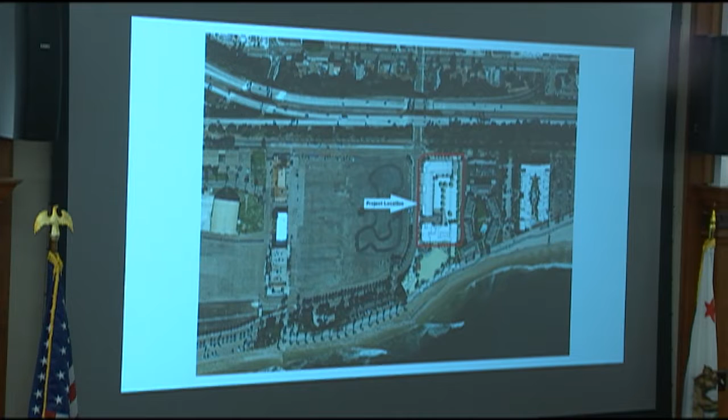An aerial view gives you a better perspective of what it physically looks like now. One thing that happened early on, already completed, is the jog in the park area has been evened out as a lot line adjustment. So when we look at the plans, you won't see that jog, it's just a straight line. It basically swaps the back part for the Hilton property and the front part for the park. Those have all been approved with all the regulatory agencies that needed to sign off.

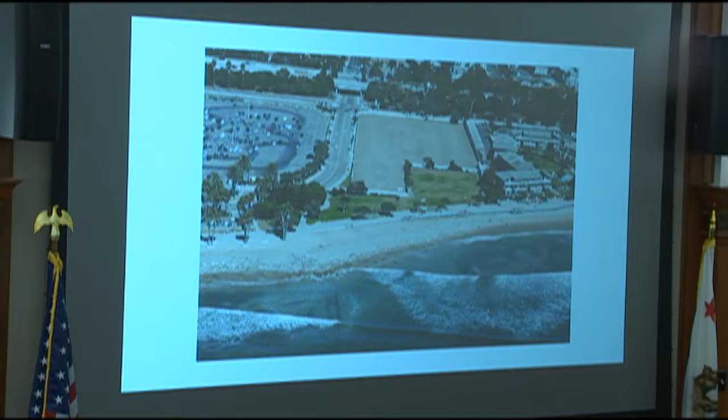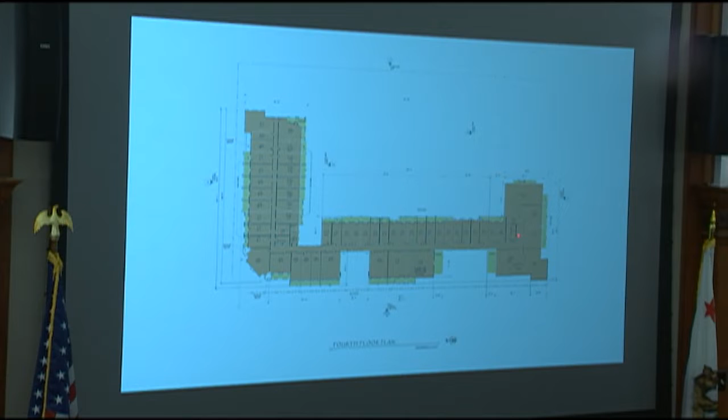These are the decks and terraces, and the more orange is the guest rooms.

This is our roof plan. You're seeing here down below at the second level where that pool deck is, and in this lower right-hand corner, we have a roof terrace. Tom will talk more about that and how we're treating it.

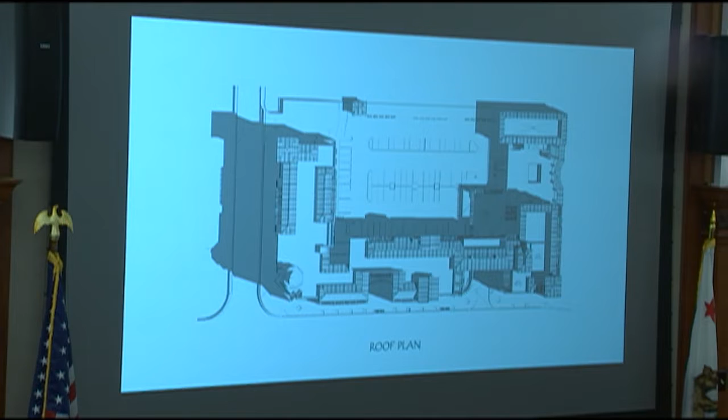So these are our elevations. Along the top is the elevation along Figueroa Street. With a lot of input from meetings with prior design reviews, we wanted a building that looks cohesive, but as a grouping of buildings, as opposed to one long monolithic building. So we've got these compatible different building elements. What you don't see in the flat elevation on top is we've got a lot of articulation.

The lower left one, this rendering is this space in here. It recesses in, and we have a little fountain courtyard in here. This lower right elevation is the entry, that drive entrance that gets you into the auto court and the hotel entrance. So we've stepped back at levels to kind of terrace the building up.

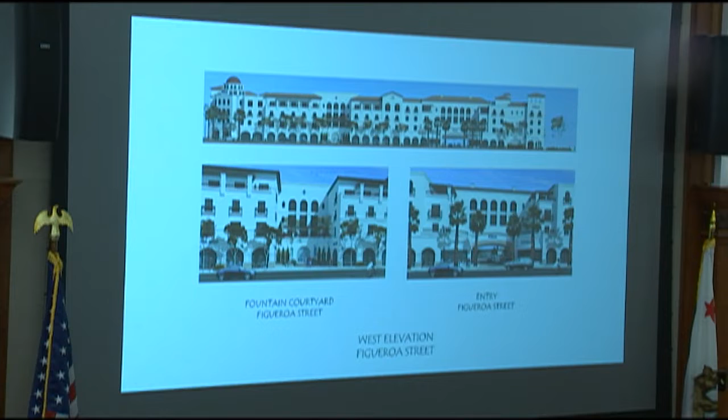And in this view, you get a better sense of the articulation of the building along Figueroa. And the fairgrounds are right here.

Back to the view of the hotel from the promenade. This, and Tom will talk more about this, is that roof deck that's right up in this corner. You're actually able to stand here and see over this edge. The mansard roof acts as the required height of a guardrail, so you're not seeing any railing up here, you're seeing the roof, but you can actually be standing in the space and looking out.

And then here, this is also space you can get into, this little roof here, but Tom can talk more about that. This is the second level, right here in this perspective, where we have the pool, and Tom will speak to that.

All right, I'll let Tom take it from here. Actually, can we go back a slide, please? Yeah.

The idea is, obviously with the view of the ocean and the climate and everything happening out here, we want to maximize the amount of public space. We've got the promenade park that we'll be looking at briefly, in front of the building between the promenade. But these public spaces, getting them lifted up so we can keep control on it. We've got the awesome views, you get the breeze coming through, really maximizing this rooftop element with the pool area and cabana seating.

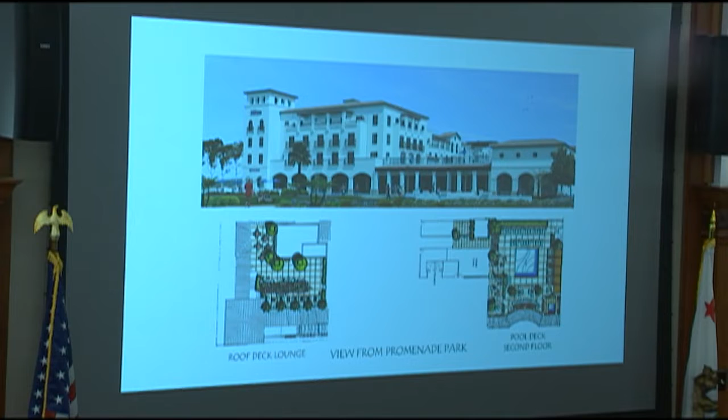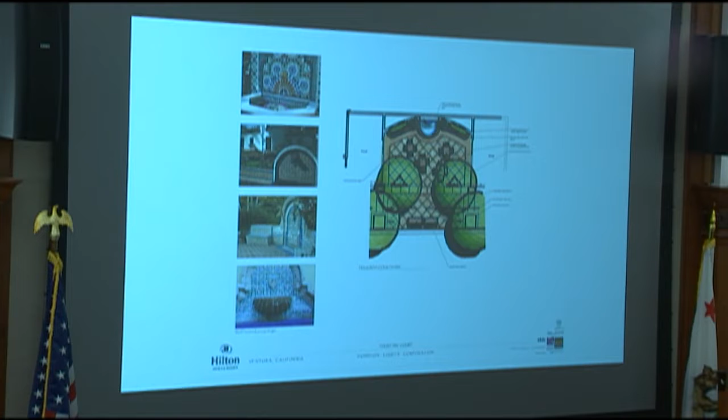Next slide, please. This little alcove is the one Bob talked about before along Figueroa, which runs along here. It's a bit large, but it's an alcove in the building to create a nice little seating area with some trees around it. We've got a fountain that ties in architecturally, so it creates a great little kind of cloistered space along the facade of the building.

Next slide. Oh, and then we have a larger view. I didn't realize we had it set up this way. So you can start to see that better with the ocean over here, the views out, keeping the views towards the ocean.

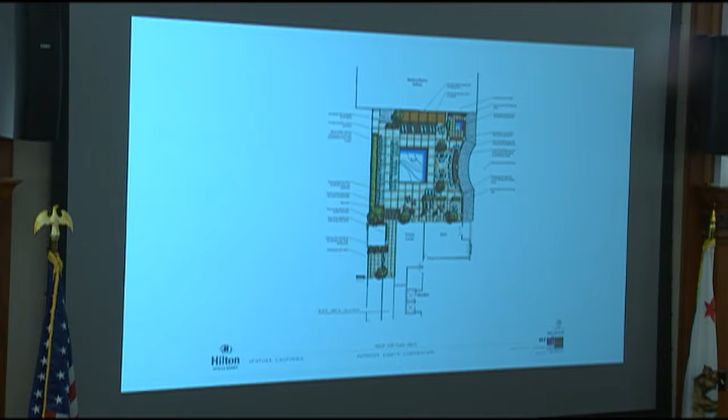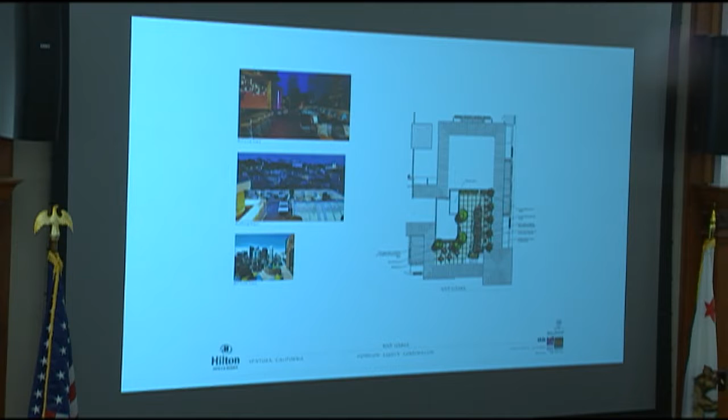And then that rooftop space, the idea is you're really creating a nice outdoor element, and it's pulled away, close to Figueroa, so it's on more of the public side of the building. And then the next slide is going to show the whole site plan to kind of see how we bring it all together.

Again, that roof, that pool area was sitting right up in here. The meeting room space rises up about 5 to 7 feet higher than the pool area, so it creates a bit of separation between the adjacent houses that are there. The bulk of the building, the way the site is set up, encapsulates the interior parking space.

With the way that we've designed that parking space with interlocking pavers, with shade trees, and the way the motor court comes in, it's really meant to feel like an old motor court and not just a traditional at-grade parking lot. So views from within the hotel looking down on it, it's not like you're just looking at a parking lot. It's a very nice part of the site.

We really wanted to activate the Figueroa frontage, so that's the idea that there's some small retail. We've got that little alcove with the fountain. The way the street trees work with the architecture really starts to break up the lineality of the space and make it an engaging, enjoyable space to hang out.

It's important to understand that the property line, the city line between the park and the hotel, is right there along the edge of the veranda. So this is what Pete was talking about - we still have to go through that process again. We already went through the Parks Commission once and they were really supportive of the ideas, but that was about 5 years ago. Our project is from this line backwards.

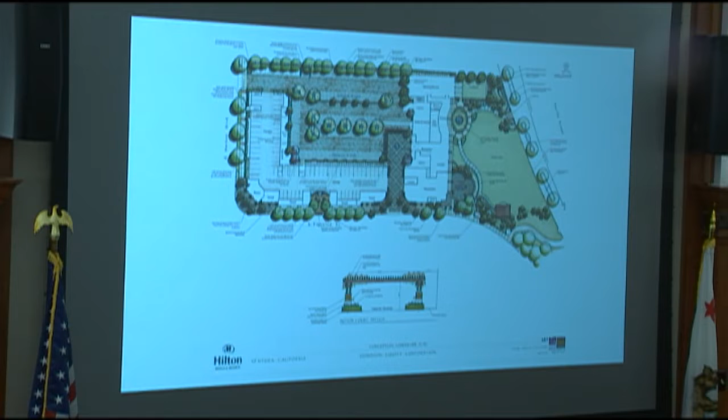I think we went through it really, really quick, just to give you a quick overview with the understanding that you're probably going to have lots of questions, and we're excited to talk to you guys about it. So thank you.

Was there anything more, Bob? No, that's okay.

Okay, do any of the committee members have any questions of the applicant? All right, I'll go ahead and start. Thank you very much for the presentation.

I appreciated your comment about wanting to activate Figueroa. I think that's really important. I like the fact that there are commercial spaces shown there. My concern is with the depth of those and what types of tenants would go in there. Can you explain? I didn't see any dimensions in those. I know that they're sort of long and linear and broken up a little bit. So can you talk a little bit about what the thinking is in those spaces?

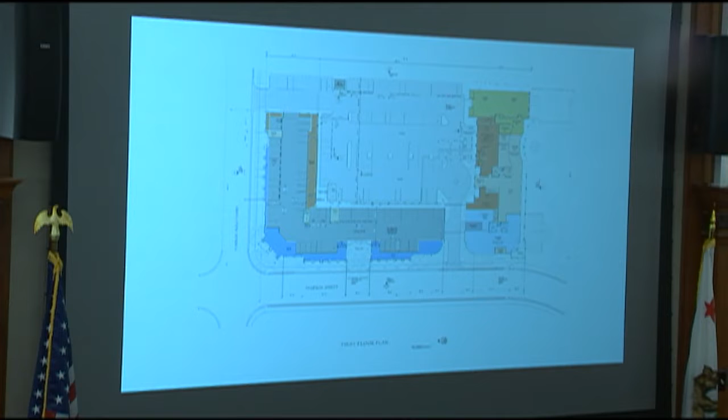No space has been leased yet. As we've been designing these spaces, what we've envisioned is - let me show this here. So this is a full-service restaurant, and the square footage is unfortunately too small for me to read, but I think we got about 3,000 square feet in here, which is sufficient for a full-service restaurant.

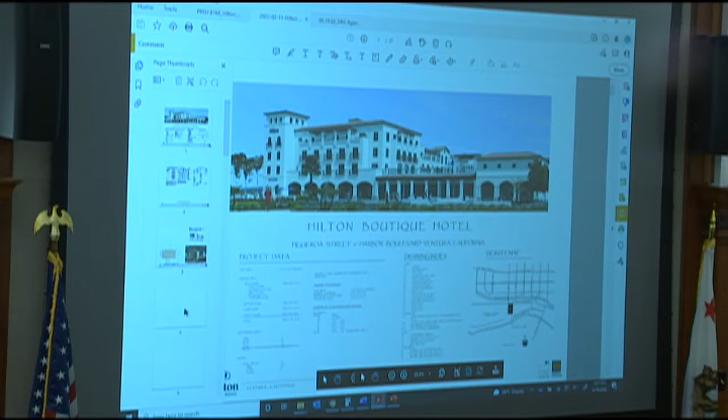So this is all restaurant. With this being the dining area, probably an exhibition kitchen kind of in here, plus back of house kitchen, and our loading for the restaurant off of the drive. So we're not going to tie up Figueroa with deliveries for the restaurant.

This we see could be a nice coffee shop corner. Then these spaces we see, maybe that could be a bike rental or surfboard rental, where you need a lot of display space, not so much a lot of merchandise showcasing. So that's kind of what we were thinking about for possible uses along here - even potentially something like a snow cone or shave ice, those sorts of smaller retail that can activate the street frontage.

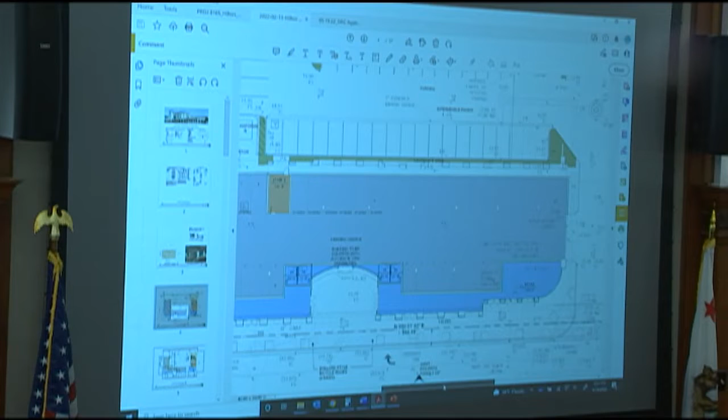What's wrong with the snow cone? Nothing. What is the depth of the blue area there - the retail area, not the deep part, but the thinner part, where you were talking about having the shave ice and bike shop? So for that order of magnitude, this is about a car stall depth. Which is what, about 18? With compacts it's less, so that's only about 9 to 12 feet, is my guess. So it's narrow - very narrow.

Envisioning the kind of businesses that would come in here, it would probably be more of the display part, or if it's a bike rental or Segway rental, that's where they'd have it. But at these corners, this is really the retail entrance, creating this nice courtyard. You come in here, and this is the business end of these spaces, and this is more the display end.

And then here we have another fairly large space, just over 2,000 square feet, which might make a nice little day spa or something like that. But again, that's counting that whole display area, and we're limited to the depth we have because of everything else coming across the site.

It's Harbor Boulevard. We're really focused on Figueroa as the spine that takes you back up into downtown, as opposed to this, we don't really see a whole lot of pedestrian activity here. But we thought this might be a nice place to display, maybe even with the Historical Society of Ventura, some seasonal stuff here.

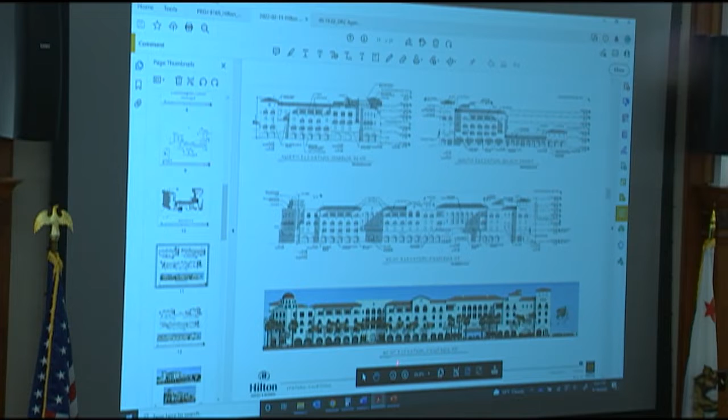Yeah, I think you're talking about this little area in here. Do we have the vignettes? There, yeah, section on that, kind of shows it on the bottom. Yes, up in here. So this all depends on which retail spaces, which retail uses take these two corners. There is potential for maybe getting some seating out here, depending on what retail uses end up there.

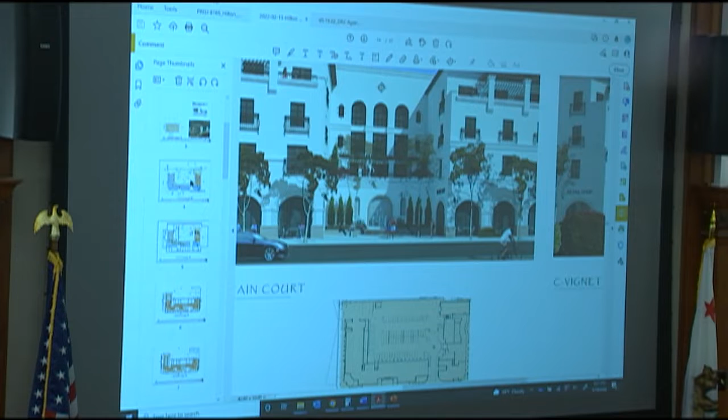And are you dealing with a setback from the property line? Yeah, the property line kind of bisects it, so that's the right-of-way line there, and then our project is behind it. This is 10 feet, this is like 7 or 8 feet, and then the building is like 5 feet beyond that. So from the face of the building to the face of curb, it's 12, 13 feet, something like that. Over on the Harbor side it's deeper, more like 20 feet from the face of the building to the curb.

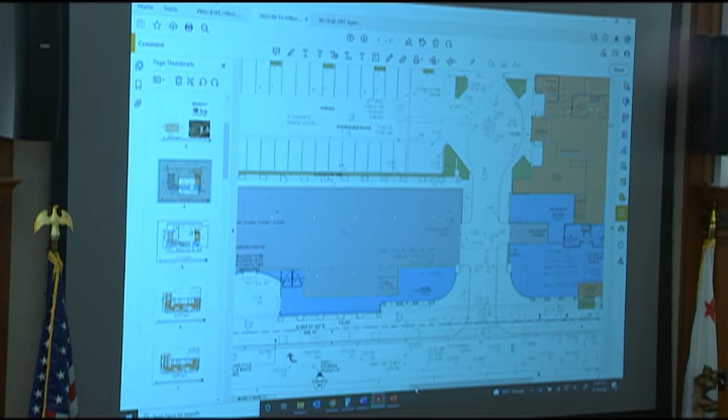Question for staff: is there a desired sidewalk width along there from either planning or land development? On Figueroa Street, that's one of the streets in the downtown specific plan that has a streetscape plan associated with cross sections, so we'd be looking that they build out what the downtown specific plan requires. I'm not quite sure the exact dimension, but I believe it's 10 or 12 feet, and we'd be looking that they do that.

Okay, and I'm sorry, just to comment on that, we did look at that, but I just realized I don't know if there's been any updates to the standards recently. To the downtown? No, not to the downtown specific plan. So we did look at it at the time, I just don't remember the specifics, but we were aware of that.

You're within it. Yeah, that feels really nice. I think...

If there were an opportunity to get a little bit more depth in those retail spaces, I would maybe consider that, just to make them that much more viable. They feel really, really narrow and tight to me right now, and I want those to be successful spaces as well. So maybe a consideration to think about as you move forward.

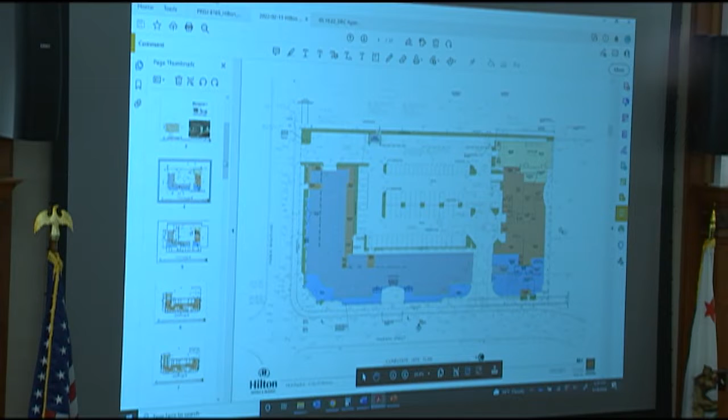Any more before I chime in? Okay, I'm going to take more of a conceptual approach, maybe something you would have seen in 4th or 5th year architecture school. Considering the unique beachfront character of Ventura, obviously you started with a blank sheet of paper, tabula rasa. How did this concept evolve? Why this design? What makes this unique and conforming to the character of Ventura?

That goes way back. When we first started with the Embassy Suites, I think the choices in the downtown, or what was being recommended at the time was either Victorian or Mediterranean, I think. So very early on, we went in that direction.

And that was recommended by who? Who is guiding you or pointing you? I think that was in the standards, the downtown standards, or input from the design committee. So we felt it was more appropriate to go with the Mediterranean style than something that was more of a Victorian style. Okay, I think the downtown standards do encourage that.

And it was, we had 4 or 5 meetings with the Design Review Committee prior to this, and very much their direction was pushing towards that Santa Barbara, that clean Santa Barbara style, with providing very specific direction on the corner element that you see at Harbor and Figueroa, and even the way that the tower element above the restaurant is that you see on the top. There was very specific direction that was provided through those, correct?

Yeah, and it was never really a question of the style that we had chosen, we were fine-tuning. It was more the articulation of it, things like what I mentioned, feel more like a grouping of buildings instead of one big building. And how can we take different elements of that Mediterranean/Santa Barbara style to make it look like a block of cohesive buildings in the Mediterranean style.

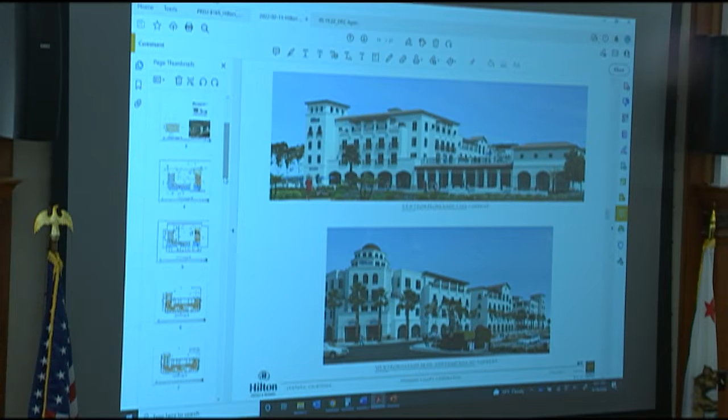The dome kind of concerns me because it seems kind of Hollywood. I don't know what's inside that dome, what's going on. It's a space that's not a functional area up there.

It's interesting because a dome was something that some of the previous members were really pushing for. Yeah, and I think they were asking for blue tile one time up there. They really wanted it to stand out. Santorini.

Yeah, this whole thing's a moving target, and I understand where you're coming from. This is not an easy project. It's very challenging and very complex. But I don't know whether you really need that dome or not. Obviously, it's going to cost money to put it up there. You're going to have to maintain it, and you might want to think, is it really worth it to put it there? And is there support from the other members as well as the community or staff on that? Is it something that could disappear and no one's going to really be concerned about?

So I think that's an issue to consider. But try to make the building as inviting as you can to the public, especially if you have a lot of rooftop amenities. You'd want to get as many people up there as possible to take advantage of the views. It's a $1 million building with $1 billion views, is what it comes down to.

Same thing with the rooms. Anything you can do to open up and give as much of a view to the people staying at the hotel in their rooms, whether through balconies or larger windows. I assume your windows are recessed in this. They're set back 3 inches.